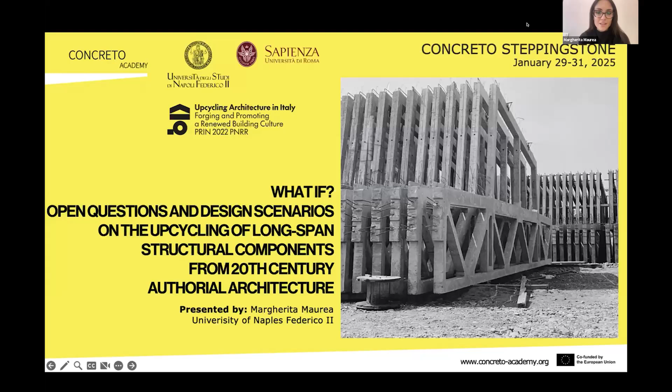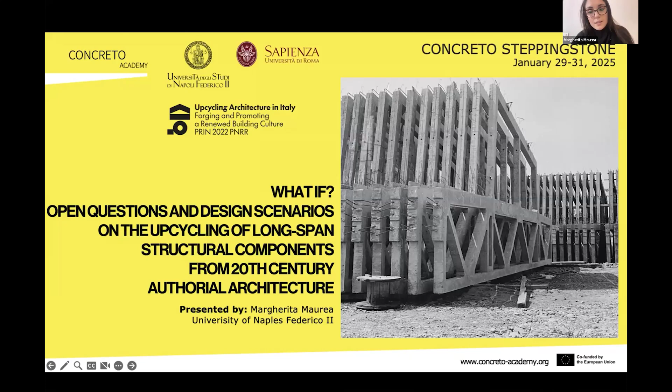Today, I will talk about research conducted in collaboration with Professor Alberto Bologna from Sapienza University of Rome, whom you already met on Wednesday when he spoke about Pierluigi Nervi's works. This research is part of an ongoing program entitled Upcycling Architecture in Italy, and it was presented at the last International Docomomo Conference held in Santiago de Chile last December, where I met Irene.

Our intervention is entitled 'What If?' As an open question, we would like to discuss the upcycling design scenario for long-span structural components from 20th century authorial architecture.

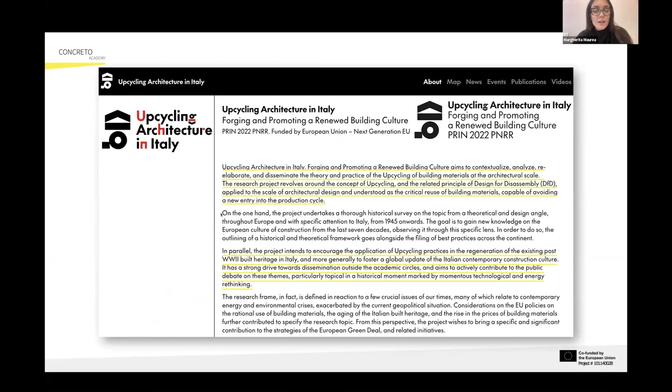This research is part of a more extensive research program named Upcycling Architecture in Italy, Forging and Promoting a Renewed Building Culture. It is an ongoing project funded by the European Union's Next Generation program, and it aims to analyze the theory and application of upcycling at the architectural scale in Italy and in Europe in general.

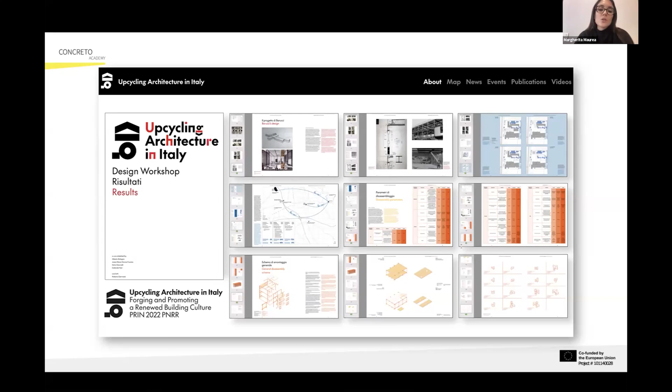At the same time, the project intends to encourage the application of upcycling processes in the regeneration of existing post-WWII heritage, promoting design workshops to identify operational strategies that consider disassembly and demolition as a process within design, aiming for a more rational organization and utilization of our resources.

Here you can see the research website if you want to have a deeper look, where you can find a lot of material about this topic.

As I was saying, the research was initially developed for the recent Docomomo International Annual Conference, which was focused on exploring and developing new ideas for the future of a sustainable built environment, while also promoting the preservation of modern heritage.

The conference was divided into thematic macro topics: the first one was sustainable development, and the second one was cultural diversity. Our intervention was part of the section Sustainable Technology Research into Action.

More in detail, the section was divided into discussion sessions, and we were part of the topic Concrete Long-Span Buildings, promoting strategies for a sustainable rethinking of public architecture and industrial heritage.

In this occasion, we will discuss the intersection between heritage preservation and sustainability, and we propose to talk about the topic of adaptive reuse through the notion of upcycling.

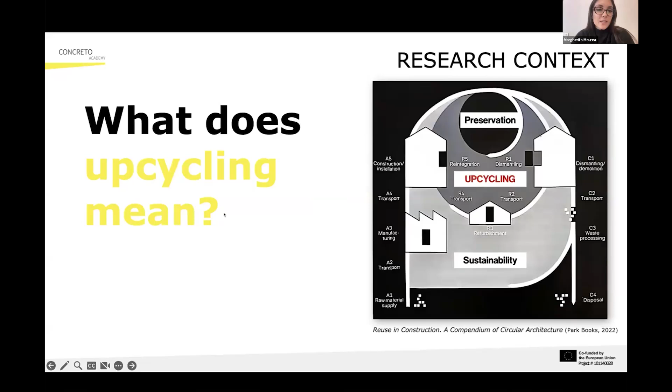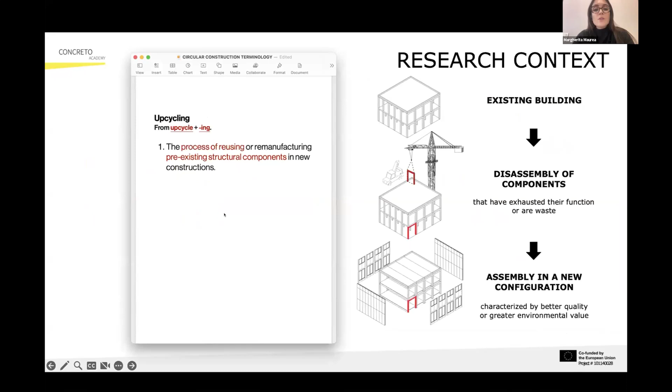So what is upcycling? What does it mean? In technical terms, upcycling is the process of reusing existing structural components in new buildings. In an extreme simplification of the process, from an existing building we disassemble selective components and reassemble them in a new configuration, possibly even in a different location. In this way, the lifespan of structural components is extended, and potentially waste is used as the main material in the supply chain, while this is much different from recycling, a more common practice which reuses materials.

For example, in the case of concrete, the recycling process involves crushing old concrete into small pieces for use as sand in new concrete.

I'd like to insist on this concept with a methodological premise related to the approach of design for disassembly, which is according to the international standard ISO 20887, and by definition concerns projecting buildings that can be easily modified or taken apart in the future.

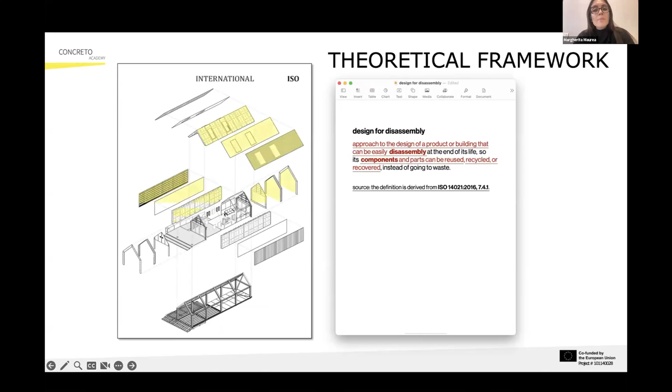This means that materials and parts can be reused instead of going to waste. And this is not at all different from the assemblage theory by the American philosopher Manuel DeLanda, which highlights how disassembly and reassembly of structural elements can enrich the concept of tectonics in architecture, because according to DeLanda, each assemblage has a contingent historical identity.

So this shift from technical necessity to architectural expression is not different from what Kenneth Frampton discussed in Studies in Tectonic Culture, where he analyzed the relationship between construction forms and architectural meaning.

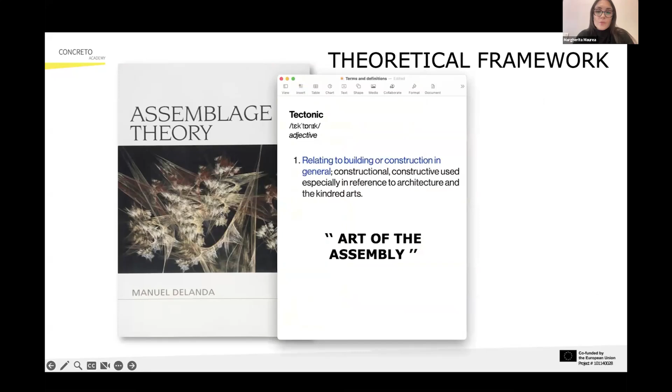But the term tectonics generally refers to the art of assembly. Here, in the specific case of defining a process for upcycling, we can see tectonics as the art of disassembly.

This theoretical framework has been extended through some recent theoretical education and practical research, such as ReCube, Rethink Revive Reuse, Rotor Deconstruction, or Upcycling Architecture in Italy.

But of particular interest to our paper are the studies conducted by the Structural Xploration Lab at EPFL, led by Professor Corentin Fivet. According to these approaches, demolition is never the first solution to account for.

This is actually no new idea. These slides collect a series of examples in Europe of entire buildings dismantled and reused.

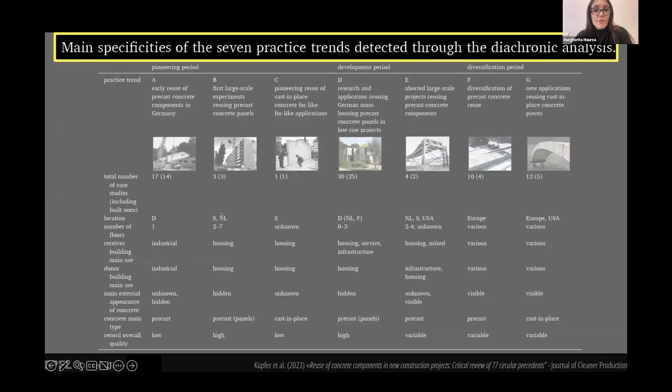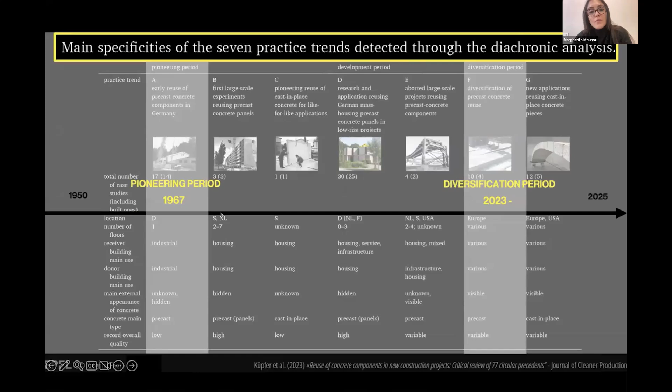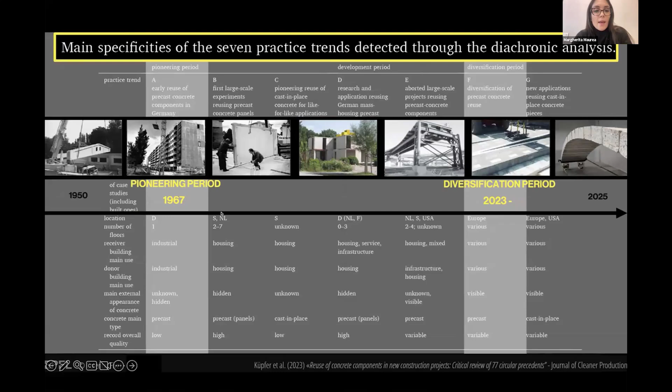Seven trends were identified by the research group of Professor Fivet. In this diachronic analysis, spanning from the late 1960s, a pioneering period, to the present, a time of diversification, many projects are analyzed. But what is interesting is that most of these examples are made of precast concrete and belong to ordinary construction. In this sense, one contemporary showcase of the application of upcycling is the housing project

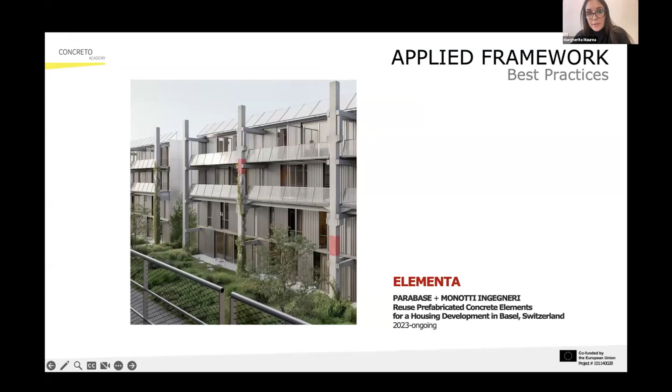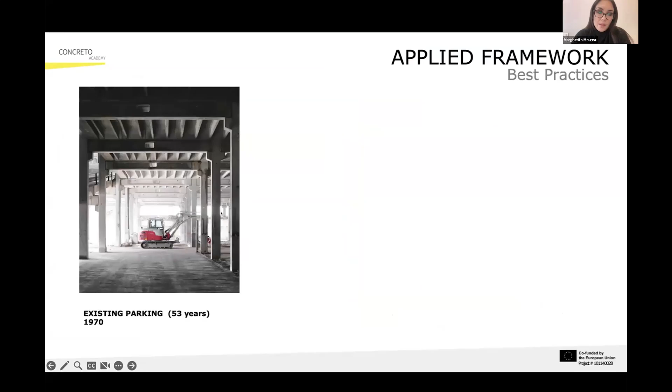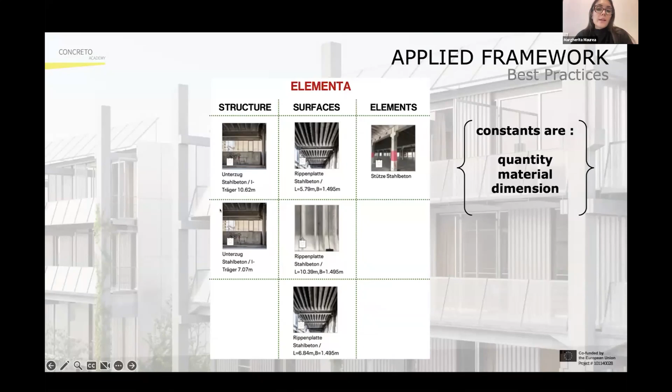But what we get from this is that upcycling is also a matter of design, because some parameters are given: the quantity of elements, the material itself, and their dimension. Here we can see a categorization of parts from the case study project into three categories: structure, surfaces, and elements. But basically, the new quest is how to transform and combine them in terms of design.

So we can say that it's a matter of design, but also a matter of revealing existing potential, which confirms that upcycling concrete components can be a new benchmark strategy for sustainability and circular construction.

Starting from something ordinary, like the building we've just seen, we can explore if this approach could also serve as a new method for preserving 20th century authorial architecture, particularly in the field of concrete heritage.

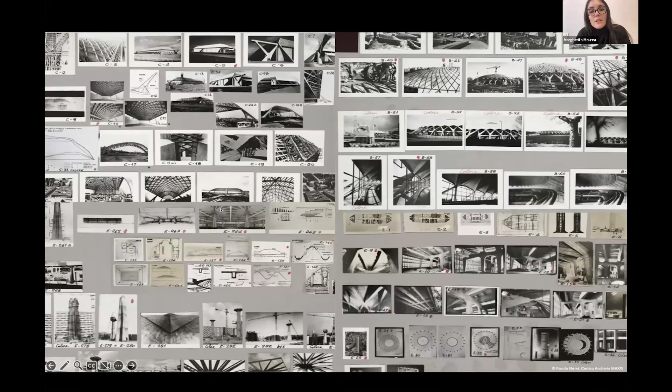In this realm, Pier Luigi Nervi is one of the most important actors, and actually the picture in the background comes from his personal archive. This is because he thought of structural systems in terms of tectonics, the very same we previously related to Frampton's works.

On the other hand, his buildings are made from precast elements that are later assembled into a whole, just as described in DeLanda's theory.

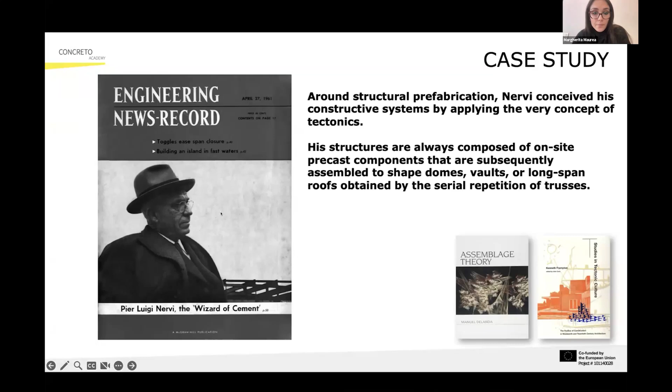In fact, in 1947, in a paper that I found in the Maxxi archives during my PhD research, Nervi summed up his design philosophy into two words: 'corretto costruire,' meaning 'to build correctly.'

Actually, this kind of philosophy consists in considering efficiency and economy above all. But on the other side, the interesting thing is that expressive possibility and architectural beauty could always be found from an oscillation of different contingent parameters. So we can say that this is Nervi's essence of architecture.

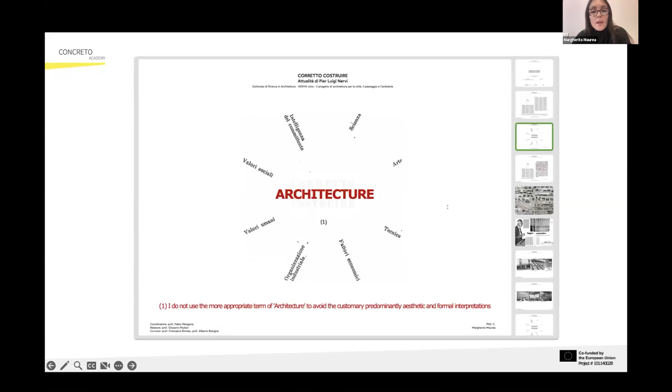In fact, in a footnote of this article, we can see that the term 'architecture' would have been more appropriate, but it was also related to the usual aesthetic and formal interpretation. So Nervi decided not to formulate it in a generic way, probably to escape any possible critique.

But with the publication of 'Scienza e Arte dell'Ingegnere,' Nervi anticipated what would be the first of his most important monographs, 'Scienza e Arte del Costruire,' extending his thinking beyond the fields of engineering towards the act of construction. Here it's important to notice the progressive evolution of the title, from engineering to building.

And in a similar way, the article entitled 'Corretto Costruire' is, in a certain sense, an early version of the second most important monograph, 'Costruire Correttamente,' in which there is a shift from the theoretical framework to the reality of construction, from 'correct' to 'correctly.'

Also here, the title is similar but slightly different. The verb 'to build' is linked with the adjective 'correct' in the early version, while later it becomes the adverb 'correctly.' As a consequence, the order of the words has to shift, so the act of building becomes primary to the quality of correctness.

But the result is a holistic vision of the project that combines efficiency in structural form with efficiency in fabrication and construction process. We see in Nervi's design a dialogue between how something performs and how it was made.

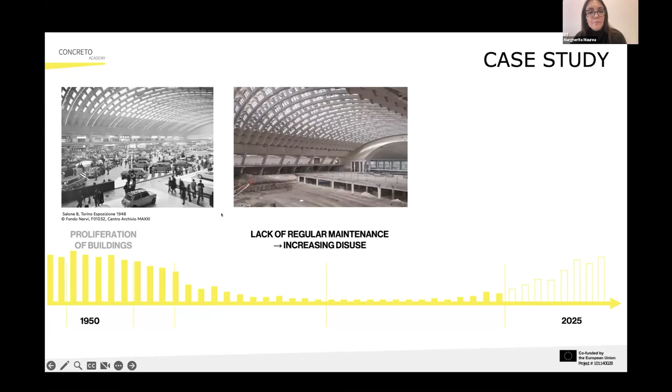Today, many present this state, or even worse - this is actually one of the best cases of preservation. Nonetheless, approaching heritage eligibility, interest towards this building is growing.

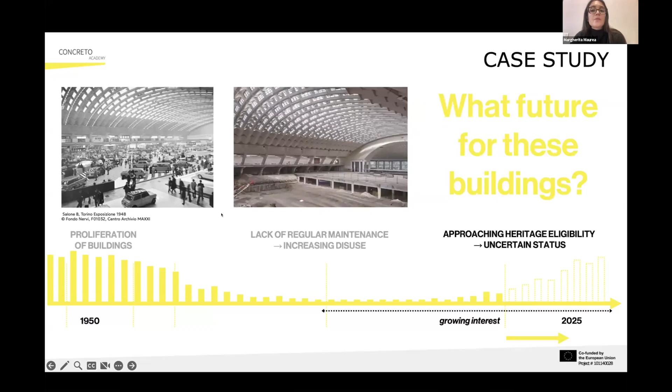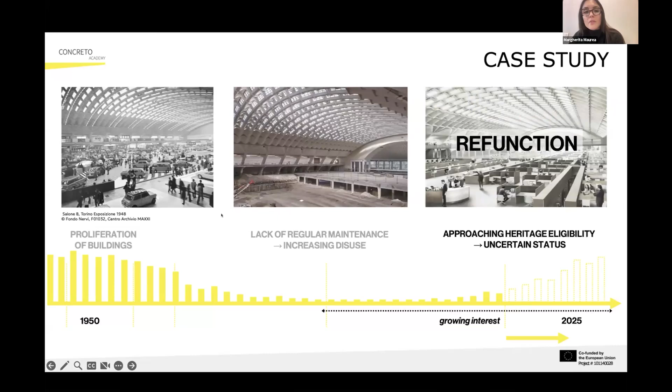So what can we foresee for the future? In the specific case of Torino Exposition Hall, reuse was preferred and it is currently under construction, as in the case of the Palazzetto dello Sport in Rome, even if in that case the function is the original one. But what about cases of minor historiographic interest?

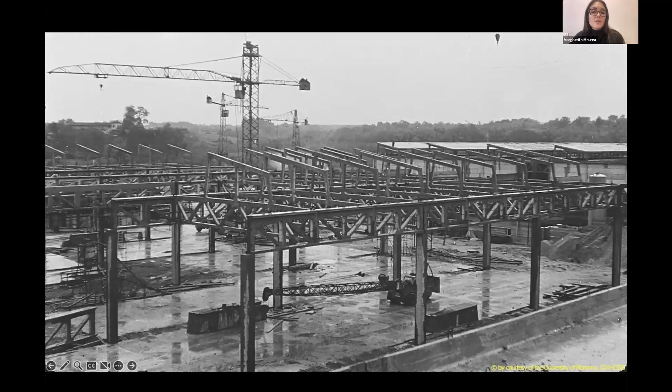How can heritage be safeguarded? And finally, can upcycling be a strategy? We refer to many industrial buildings with long-span concrete structures, whose design is based on a tectonic assembly.

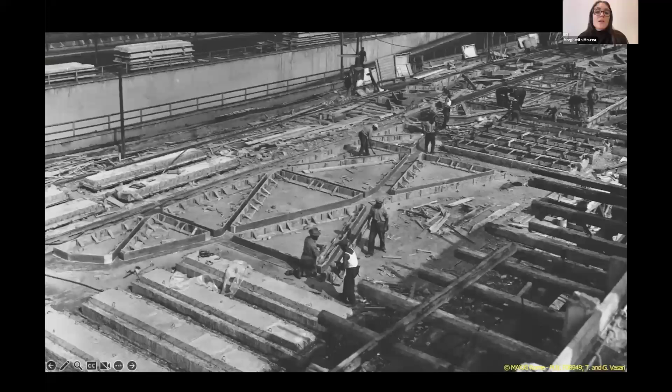Many of these buildings are not listed as heritage and are still free from specific maintenance constraints related to cultural and land government institutions. But they present many innovative solutions, and in this sense represent a significant case study to extend knowledge, conservation, and valorization of late 20th century heritage through the process of upcycling.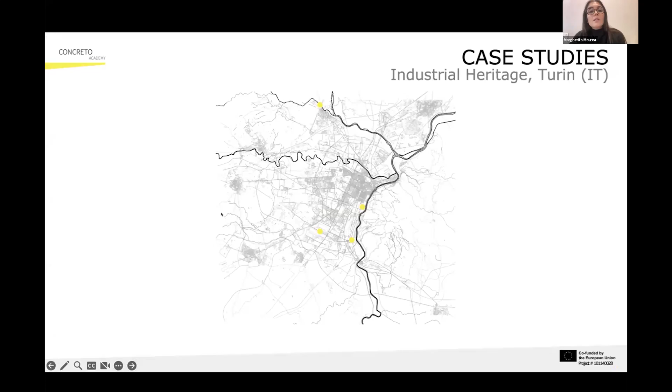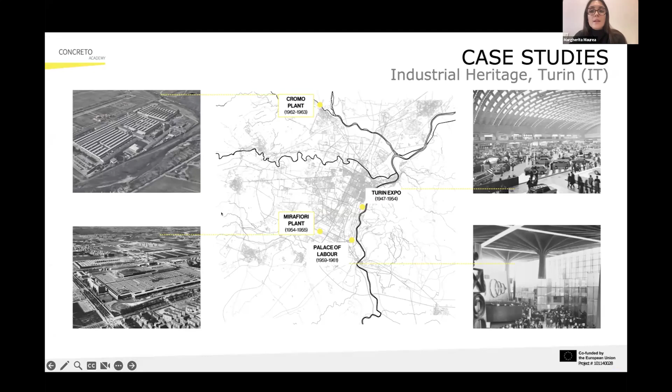In the city of Turin, Nervi built some of his most famous buildings, such as the Turin Exposition Hall that we've already seen, and the Palace of Labor, for example. But the largest surfaces are two different industrial buildings: the Mirafiori plant for Fiat and the Cromodora plant in Venaria Reale.

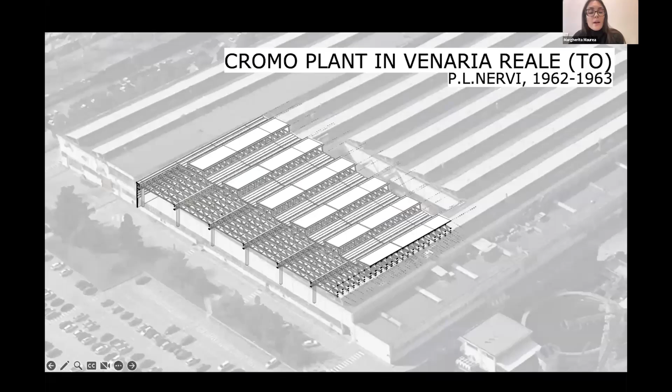Starting north in the Venaria Reale area, the Cromodora plant was built in the early 1960s. Looking closer, we notice the repeatability of the structure, involving an on-site prefabricated system and a ferrocement assembly process to simplify construction and shorten delivery to the building site.

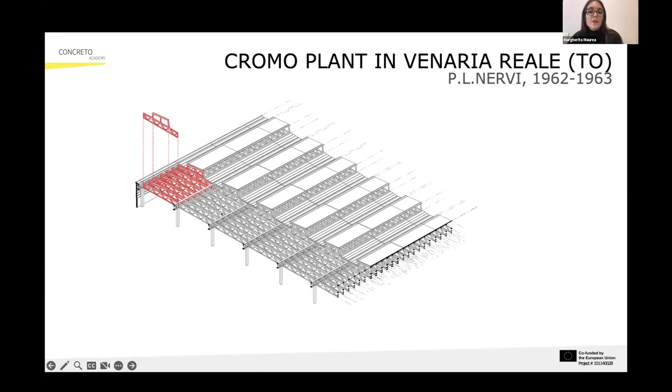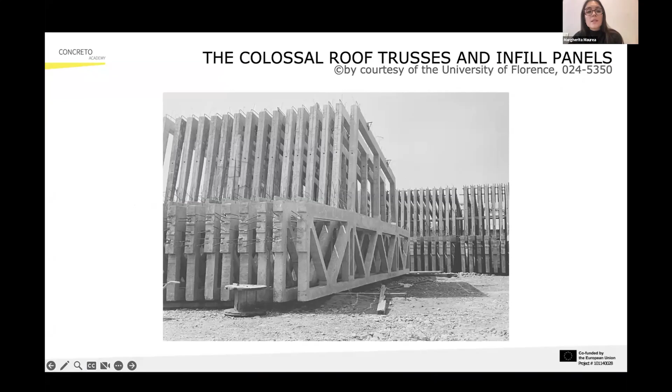This is a picture from the construction site, but in the idea of upcycling, we could imagine that this is also the same moment in which we could disassemble the pieces to later use them in a different construction.

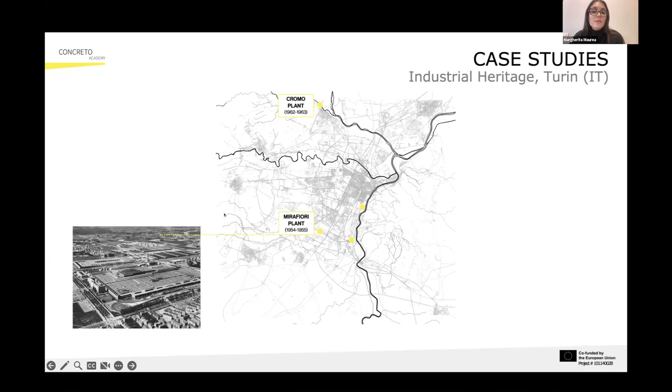A very similar situation, yet even bigger in terms of area, is the case of the Mirafiori plant, south of Turin. This is an early project for Fiat, in which Nervi was in charge of the new extension of the industrial area, and also had to deal with prefabrication and assembly to shorten construction time and simplify the technological aspect.

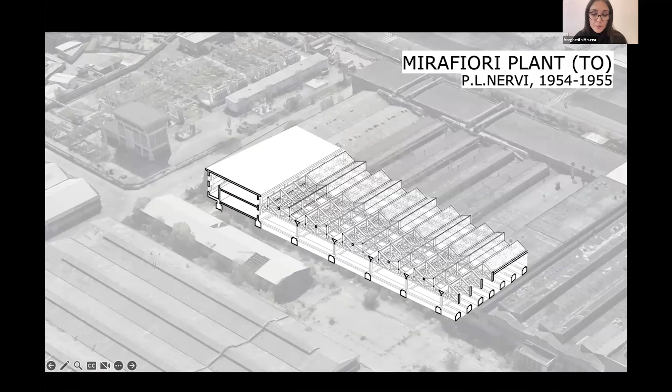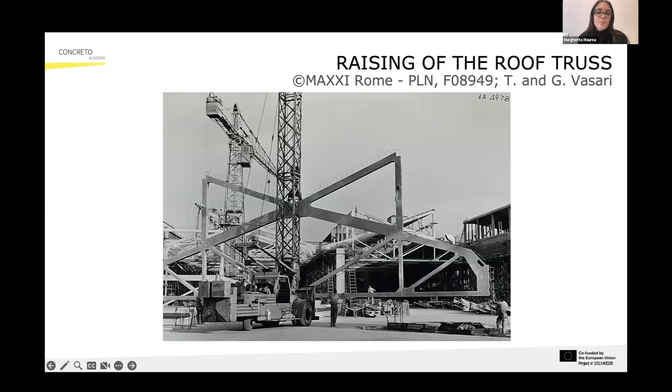The covering structure of this new core was supported by very specific and slender concrete trusses. Here we see Nervi's structural genius in the use of minimum material and minimal section, in line with economic design criteria. Again, we can imagine this is the same moment as a disassembly process.

These case studies are significant to contextualize the theoretical and design approach of upcycling, and so the ethical implications. We have not actually tested an application of the design, but the question we pose is: in the case of disuse or even demolition, can we imagine a new life by reusing the existing elements?

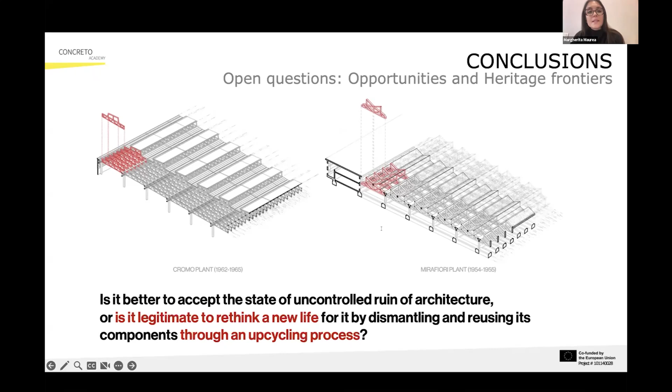Will we consider this a new form of heritage in the future? So we will say that this is a potential action that represents an opportunity for preservation of cultural and intellectual heritage, because it's not just about preserving tangible values, but also the intangible ones in terms of ideas and visions.

So we think this immaterial dimension is just as important as the material one. And so, can the upcycling of components offer an alternative to preserve this legacy? This is the main open question of our research.

To conclude, and in line with the topic of Concreto Academy, our research aims to emphasize the exploration and development of a new idea for the future of a sustainable built environment, which can also open up new boundaries and design scenarios.